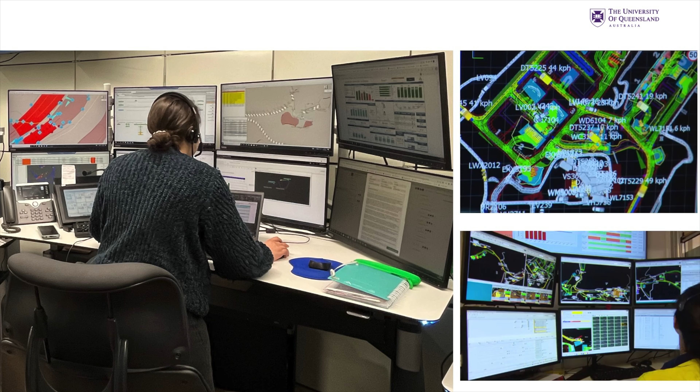My colleagues and I have been looking at the human aspects of automation for probably about the last 10 years. So I'm not going to show you any pictures of equipment. I'm going to show you a bit about what automation looks like from the point of view of the people in the system, because it's important to realise that automation doesn't remove people from the system. It just changes the roles that they play. And for a system to be effective in doing what it needs to do, and to do it safely, it needs to be designed taking people, the aptitudes, the capabilities of people into account.

So this is a picture of a control room in Chile. We're looking at the screens, lots of screens. So the control room in this case is automated haulage, but it doesn't really matter what it is, in the sense that the dominant thing you'll see in all of these applications from the point of view of the people in the control rooms is the incredible array of information that they're presented with. So there's information received, decisions made, communication with the system, the IT system, but also the other people in the system who are out in the field. So it's a very busy, cognitively demanding situation. We'll come back to that in a minute.

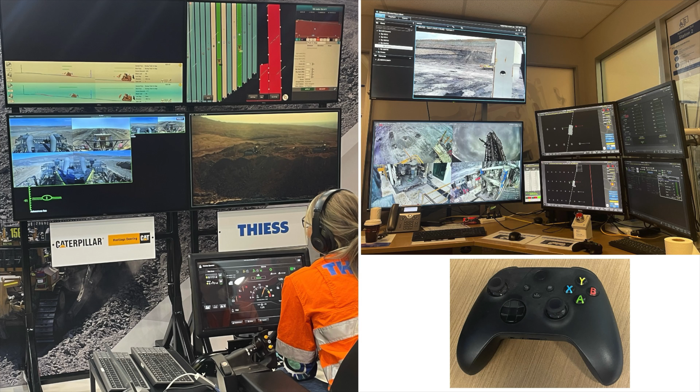And there's some examples of interfaces that are involved. On the left is a semi-autonomous dozer system. Now that photo was taken at the Convention Centre in Brisbane at the World Mining Congress. They had a setup with the dozers in operation on site in central Queensland. So very impressive technology. You'll see there we now have some interfaces that mimic the situation in the dozer, because it's a semi-autonomous system. On the right is the control room for autonomous drills.

I particularly like the Xbox controller that's there for the occasion when there is teleop required. It's an interesting solution. Rather than mimicking the controls in the drill rig, let's change the interface to something that perhaps is more familiar to some of the newer generation. But what that does is introduce a new potential error, because to achieve the ability to control the different functions of the drill rig, there are 3 different modes that the controls operate in. And so once you've got different modes, then there's the potential for mode error.

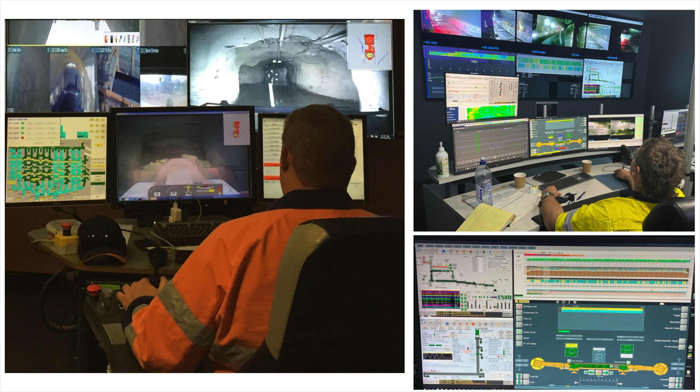So on the left there is the control room at Northparkes semi-autonomous underground loaders, and we're going to look at that situation in a little more detail later. On the right, underground longwall automation, very impressive. So removing people from the hazards, particularly underground hazards, that is the most effective way of improving safety and health. And I'd argue that is the way that the industry will achieve a step change. It's the only way. We've got to remove people from the hazards. And those situations there are both very effective at doing that.

So I'm going to talk a little bit about some of the issues that have been encountered, but don't let anything I say convince you that you shouldn't be going this way. This automation is the way to go forward to improve safety and health.

So Australia is the gold medal winner for introduction of automation. There's no doubt, if you look at the number of installations or the number of vehicles, there's Australia and then there's daylight. A lot of that was driven by Rio Tinto about 10 years ago, and John McGagh was the head of innovation at that time. So I've stolen a slide of his from a presentation that he gave about 10 years ago. It talks about his reflections on what was required to achieve the successful implementation of automation, and automated haulage in particular. So this is the slide that I stole.

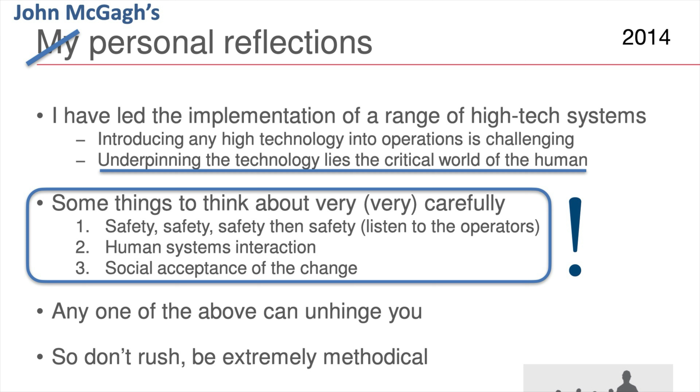It's his personal reflections. So it's important, because if I say it's really critical that human factors is considered, you're going to say, well, you would say that. That's your profession. So this is John's summary: underpinning the technology lies the critical world of the human. Safety is absolutely critical. If you don't get the safety right, then there's bound to be some problems. Listening to operators. So it's pointing to a human-centred design involving the people who do the work in the design. We'll come back to that again later too.

Human systems interaction. Now, I think he actually meant human systems integration, and that's the final point that I'll come to in the presentation, what that actually means, how you might go about that. Because it's a well-established set of principles that were developed in other industries, which I'll argue mining should be adopting.

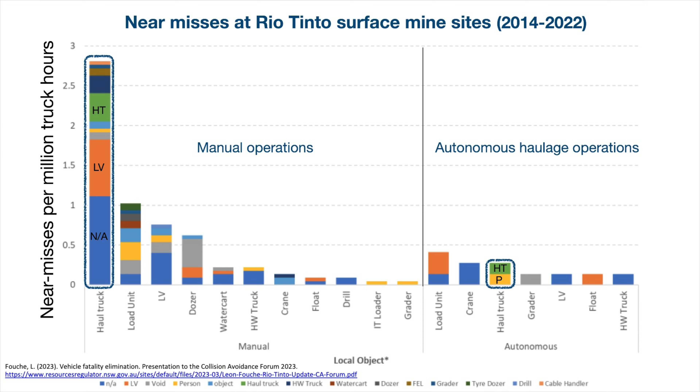So you might say, well, yes, but what is the evidence that introducing automation has actually improved safety? And there is some. So now we have 10 years experience of automated haulage, and these are some data that were presented by Rio Tinto. The bar that I've circled on the left is near misses at surface mines which are manually operated trucks, and on the right, that's the autonomous haulage operations over roughly an 8-year period. So there's a dramatic difference in terms of the near misses that are reported.

Now, one problem with those data is that the surface operations, the manually operated haulage, tends to be in countries other than Australia, whereas the autonomous ones are in Australia. And Australia is the safest industry in the world. The statistics make that clear. So you could argue, oh, well, that's just a country difference.

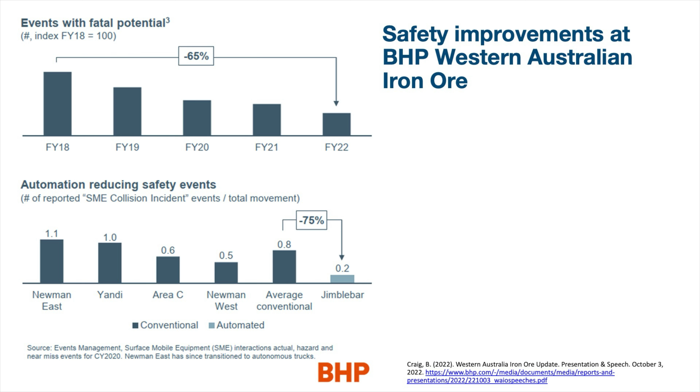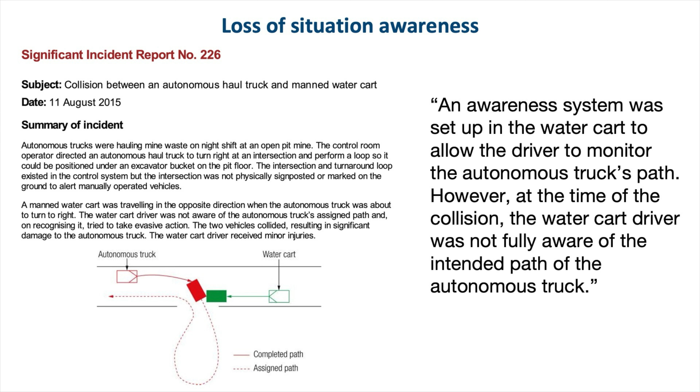However, it's not been without any incidents. So the Western Australia regulator does a good job of capturing incidents regardless of whether there are injuries or not. This is actually the most serious collision that's occurred with an autonomous vehicle. The green illustrates a manually operated water cart which was coming in the opposite direction on a haul road when the autonomous truck turned in front of it. It was an unusual place for the truck to turn. And so the water cart operator didn't notice until it was too late. Although the brakes were applied, the laws of physics apply, and there was a collision with minor injuries.

Now, the interesting thing from a human factors point of view is that there was a system provided within the water cart that was supposed to tell the operator what the autonomous truck was doing to help them maintain situation awareness, is the phrase that we would use. But the investigation suggests that, well, although there was this awareness system, the water cart operator wasn't fully aware. They lost situation awareness, is the term we'd use. So that's a design issue.

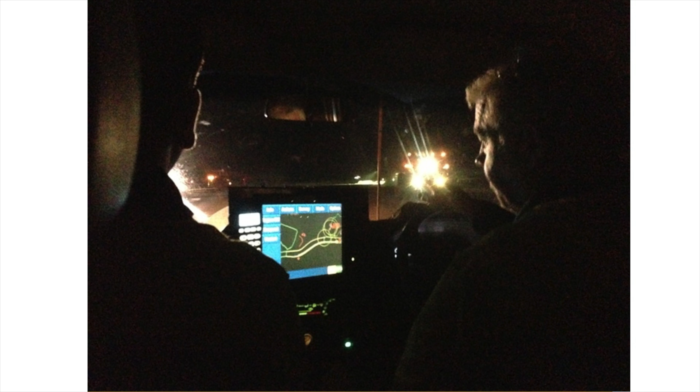And this is a photo taken from a light vehicle on a surface mine site in WA, with the lights that you can see coming towards us being an autonomous haul truck. Now, I remember two things very much about this situation. One is that the driver said, oh, he's going to turn left. I'm thinking, well, that's no he, that's a computer. There's a lot of faith in that computer coming towards us.

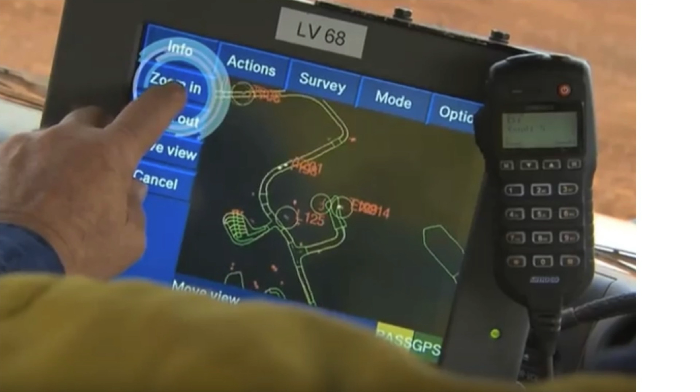And then the other thing is I'm looking at the screen there thinking, well, how the hell did you interpret that screen and get that information? Now, obviously there's training and experience and all the rest of it, but from a human factors point of view, I'm going to say that's probably not the optimal interface design. And if we look at some other examples of the interfaces that have been provided to help someone who's in a light vehicle or a water cart make decisions very quickly about whether they should stop or go, I'm going to say they're probably not the most effective interfaces, and that there's opportunity for improvement.

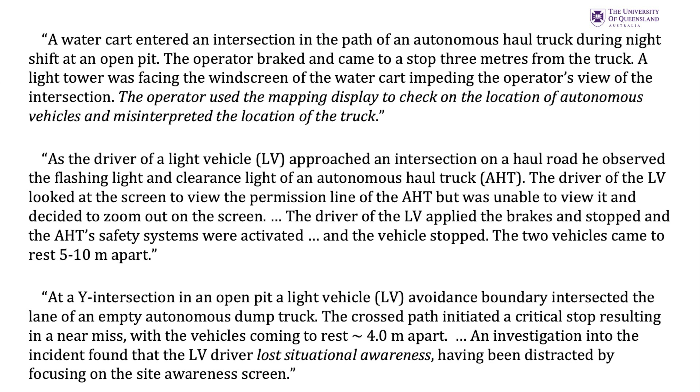I particularly like the bottom one. So the investigation found the LV driver lost situation awareness, having been distracted by focusing on the awareness screen. Well, hang on, that was the screen that was supposed to help them maintain situation awareness. So it's an example of how interface design is critical, and perhaps more attention was needed. And the way to do that is through a user-centered design process involving the people who are going to use the screen, perhaps in a human-in-the-loop simulation situation, any number of ways that could be done.

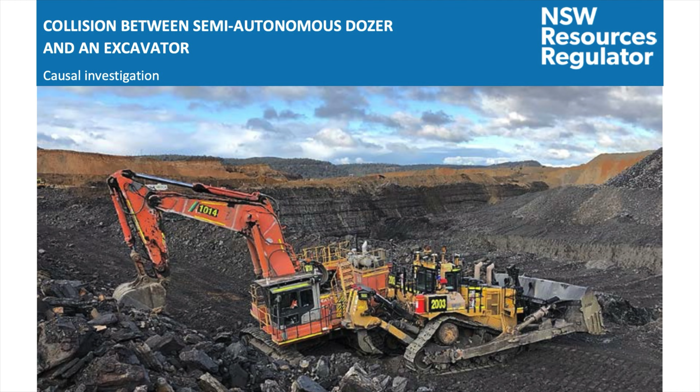So closer to home, this was a collision between a semi-autonomous dozer and an excavator. I'm not going to go through the scenario, I'm sure you're aware of it. The one thing I want to point out is that the control room operators were provided with lots of video feeds.

Because the bottom line is that if you're looking at a situation like this, just providing a video feed doesn't necessarily mean that that information can be used in time to prevent a collision. So providing visual information doesn't necessarily mean that the information can be used. So there's a few more steps required and it needs to be thought through a bit more than that.

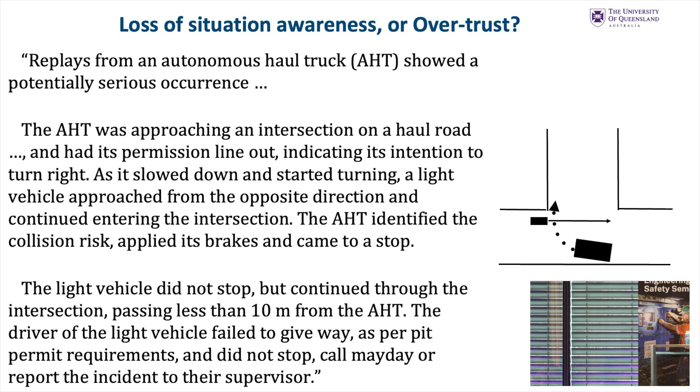We spend a lot of time training people and helping them understand the safety features of the autonomous vehicles to the point where, yeah, I trust it. In fact, I'm going to take advantage of the fact that I believe the truck will stop and I drive through an intersection in front of it. Because I'm important, I'm in a hurry, I've got to get to where I'm going. The fact that there was no recognition of that or reporting of it suggests to me that it was more likely an overtrust than loss of situation awareness.

So this is another way in which systems can fail, and my concerns are things like if you put interlocked proximity awareness on underground vehicles, as there's a bit of a push to do, to prevent collisions between pedestrians and vehicles underground. One potential consequence is that there'll be unintended consequences in terms of change of behaviour. If I'm a pedestrian and I now trust that the underground vehicles have interlocked systems and they'll stop for me, then that can change behaviour. So there's possibilities for other unintended consequences.

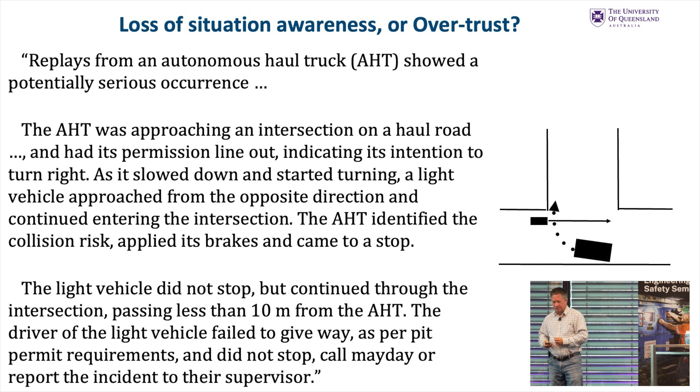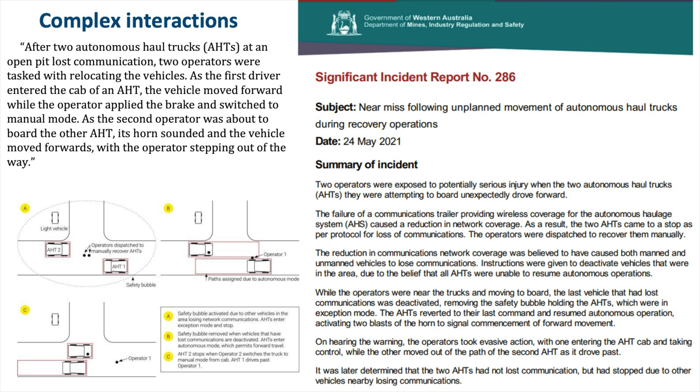So it's an example of a sort of complex situation where the safety systems functioned, but there was some misunderstanding about what had actually gone on. So you could say it's a loss of situation awareness too, but the fundamental issue there was a communication disruption. So the consequences of failures are not linear. If a system becomes complex, there are lots of different consequences that can arise. So the analysis of the risks is perhaps not as simple as in the non-autonomous situation.

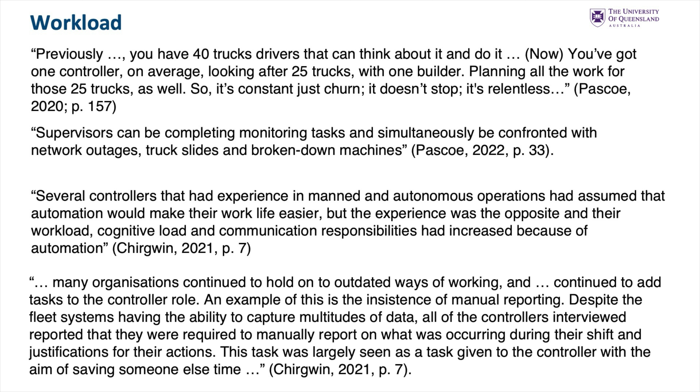And there were issues that could have perhaps been changed. So the bottom line here is that introducing automation or other new technologies needs to take into account very carefully the workload of the people involved.

So that was a quick trip through some of the potential failure modes that we identified during our investigations. There are others there as well, and I'll give you a link to the white paper that describes all of those. But I want to leave those issues aside for the moment. That's one way of learning lessons from automation, is to look at things that haven't gone perfectly well.

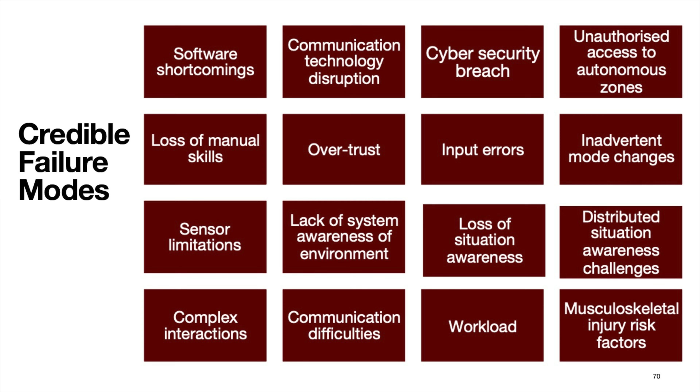But I want to turn now to another way of looking at things, and that's... that font's gone strange.

That's to investigate success. And so we did a case study a few years ago about the way in which Northparkes were able to successfully implement semi-autonomous loaders. Now, the interesting thing here is this was the third attempt that the mine had undertaken. So it's not an easy task. It wasn't straightforward. And so we want to investigate success so that we've got a better chance of being able to replicate that in the future.

So who was it I was talking to about what is a mechatronics engineer? What could a mechatronics engineer do on a mine site? I think it's the next speaker, that's right.

Well, one of the things a mechatronics engineer can do is this, because the project manager here was Joe Cronin, who was a PhD in robotics. And that, I think, was one of the key issues. Now, the way this system works is that there are operators in the surface control room that load the ore using teleop, and from then the loader autonomously travels to the dump point, dumps, and then returns to the next draw point without intervention.

The operators in the control room are each responsible for 3 loaders. They've got three screens, the joysticks that mimic the loader controls, and their job is to monitor the system status, but importantly, to make decisions in response to events that occur. So if a road deteriorates and we need to reduce the speed of the loader, or the draw point hangs up, we need to change where the loaders are going. So they're still very much engaged.

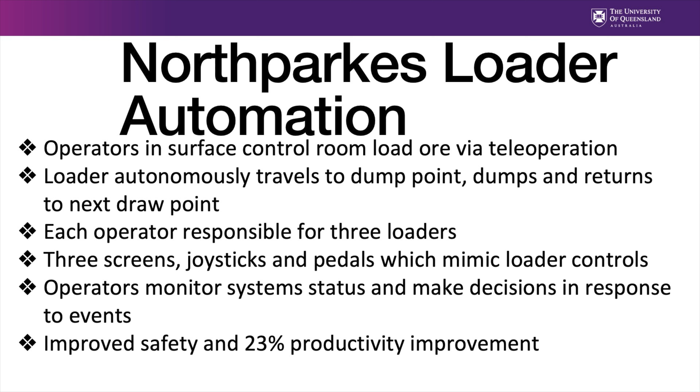So again, there's a case study I can point you to, but the highlights of that case study, the strategies for success: the first thing they did was to take everybody basically off-site and talk about what the implications of the automation were going to be. It turned out that pretty much everybody was going to be affected in some way.

The other key thing was that the designers of the system were on site, and there was a continuous and rapid feedback loop between the operators and the designers, and things like changing the interface design in response to the operators' feedback was enabled very quickly.

The interfaces had a very explicit intention about assisting and maintaining situation awareness, but there was also a role for the operators to utilise their flexibility, or provide flexibility in the interfaces so they could be adjusted by the operators, and empowering them to take action to change things. So not assuming that the engineers knew the best way to operate the system. And then there were some new possibilities that were unanticipated, which they were able to take advantage of.

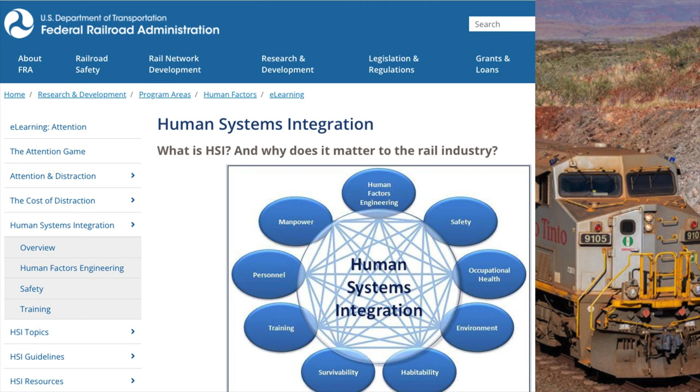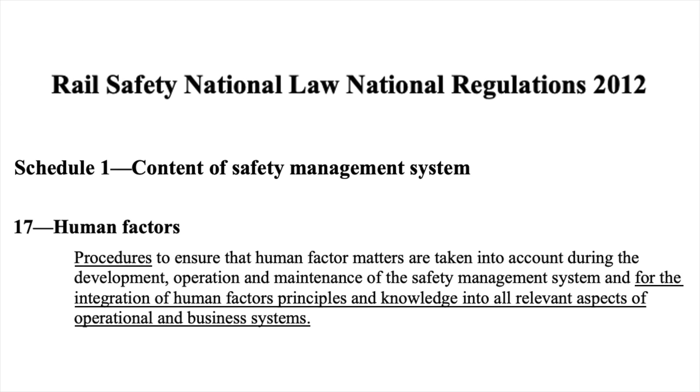Any rail operator that wants to put in a new technology has very rigorous requirements for including human systems integration. And that's, of course, understandable. We've got huge public safety issues. And there is a national regulation for rail safety. It's harmonised. I didn't realise this until recently. So rail regulations are harmonised. Although they're state legislation, they're all the same.

But it includes a statement about what's required in a safety management system, which includes human factors. So procedures for the integration of human factors principles and knowledge into all relevant aspects of operational and business systems. So my suggestion is really this is what mining regulations should also say. May not be popular, but to me that is the sort of language, or the sort of aims, that we should have in mining as well.

So I've attempted to recast the principles of human systems integration that are relevant to mining in this figure. So the first thing to realise is that it's not that we do it once. Each of the domains and the aspects need to be addressed throughout the whole systems engineering cycle, starting with requirements through design and development and then to testing and evaluation. So it's not something that happens once.

The domains we're talking about, we start with staffing. So where are people going to be involved in the system? And then the next thing you might say is, well, who are those people going to be? What experience do they already have? Because that will impact on the extent and the nature of training that we need to provide. And importantly, the other aspect there is how do we determine competence and how do we maintain competence?

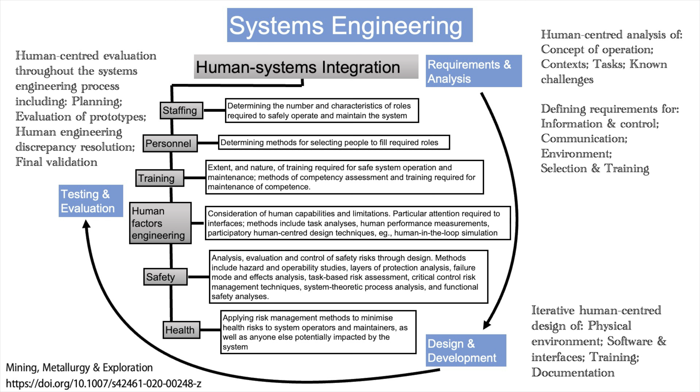Safety is a subset of human systems integration. All your safety analyses have to take people into account. If there's no people involved, it's not safety. It might be loss mitigation or something, but it has to take people into account. Some of the techniques will be familiar, but others might not. So systems theoretic process analysis, for example, is a technique that comes out of software safety, trying to understand how things can go wrong, but treating it as a control problem, not as a fault problem.

Then the last one is the health aspects, and here we might think about things like the health consequences of overload on the system. Now, again, as I said, we're talking about a whole system, multiple points through the whole systems engineering process.

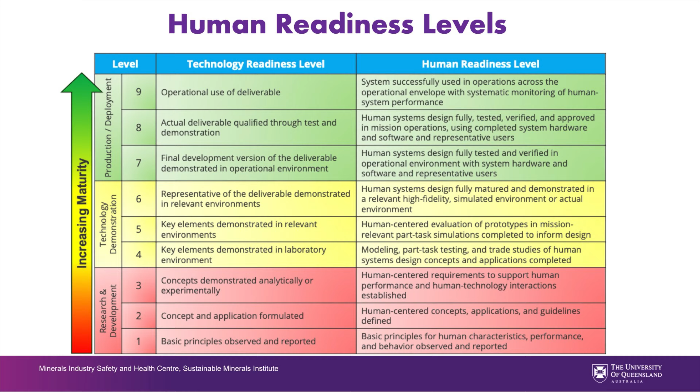Another way of looking at this is that what we're trying to achieve is human readiness levels that match technology readiness levels. So the system not only has to be ready in a technology sense, it also has to be ready to be used. So the take-home message is that any technology implementation, not just automation, needs a human systems integration plan. We need to know how people are going to be considered during the design. And it's not something that the vendor can do alone. It has to be done in conjunction with the purchaser. So we need a plan to work out how that's going to happen.

I said I'll give you a link to a white paper. So that white paper has more details, particularly about the credible failure modes, but also about human systems integration and its implementation. Thank you.